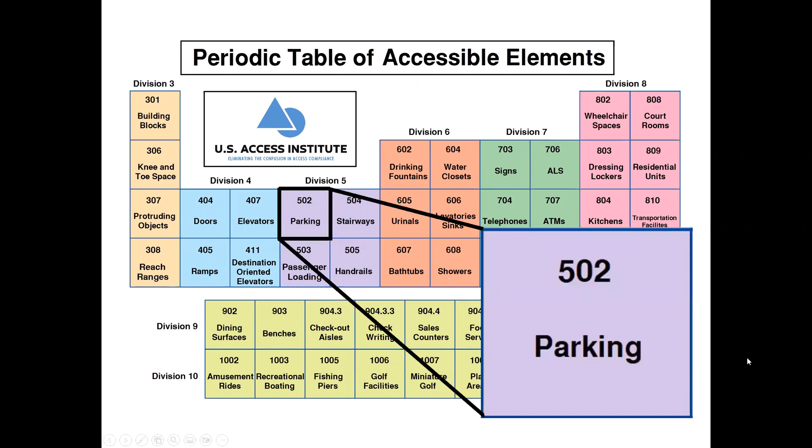All right, here we go. First, we start with the periodic table of accessible elements. It's not a real table in the access standard sense of things, but hey, we want access to be fun. Then we drill down to section 502, and that covers accessible parking space requirements. The 2010 ADA Standards for Accessible Design in section 502.2, vehicle spaces, says van parking spaces shall be 132 inches wide minimum. That's 11 feet.

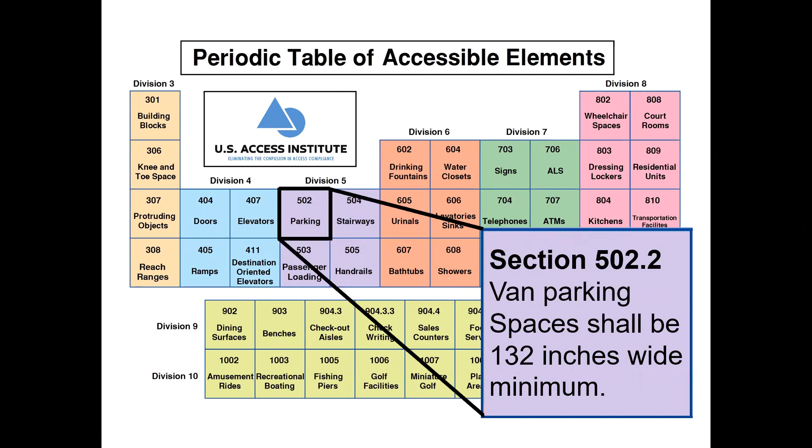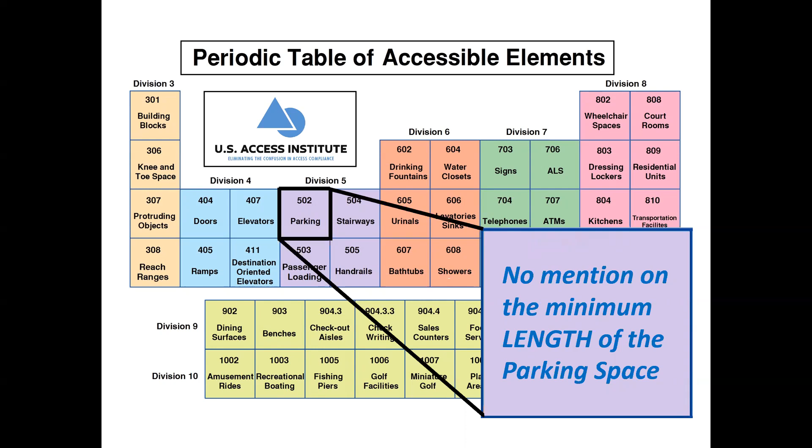There's no mention of the minimum length of the van accessible parking spaces, so let's do a quick review of some of the accessibility standards across the U.S. This figure is from the 2010 ADA Standards for Accessible Design and shows the van accessible parking spaces. They're 132 inches wide, but it does not mention the length. It is exactly the same requirement in the 2012 Texas Accessibility Standards.

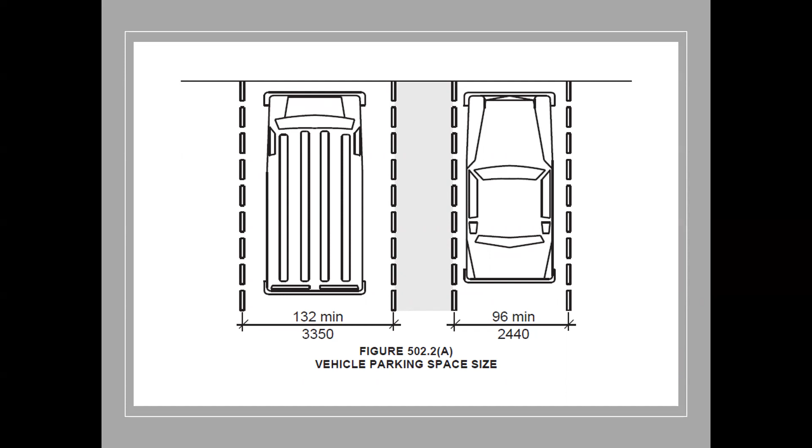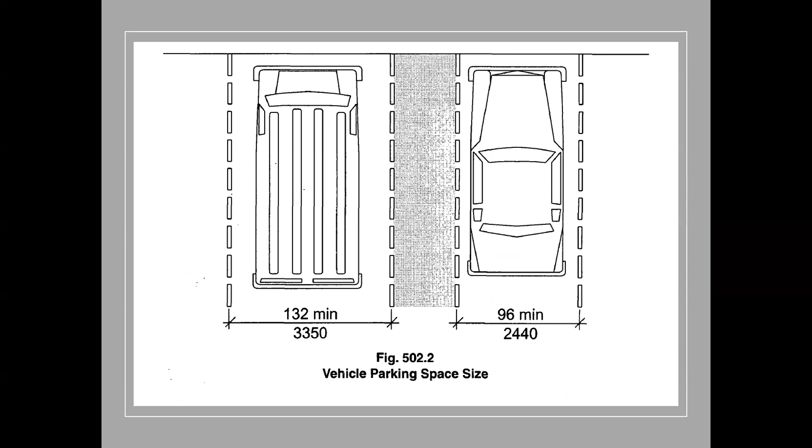In the ICC A117.1, we have the same 132 inches with no mention of length, and this is the same in the 2020 Building Code of New York State. The Fair Housing Act uses the ANSI A117.1, the 2003 standard, as a safe harbor, and the 132 inches is valid here with no mention of length again. In the 2020 Florida Building Code on Accessibility, the width of the van space is also 132 inches and no mention of length.

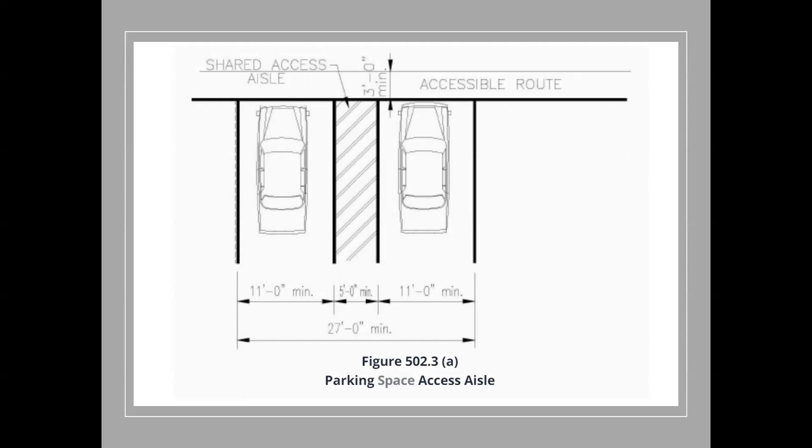The Illinois Accessibility Code has the same 132 inches or 11 feet if a 5-foot access aisle is provided. If a 96-inch access aisle is provided, the van accessible space may be reduced in width to 96 inches or 8 feet wide. All the other standards also provide that if we provide the 8-foot wide access aisle, we are allowed an 8-foot wide van parking space.

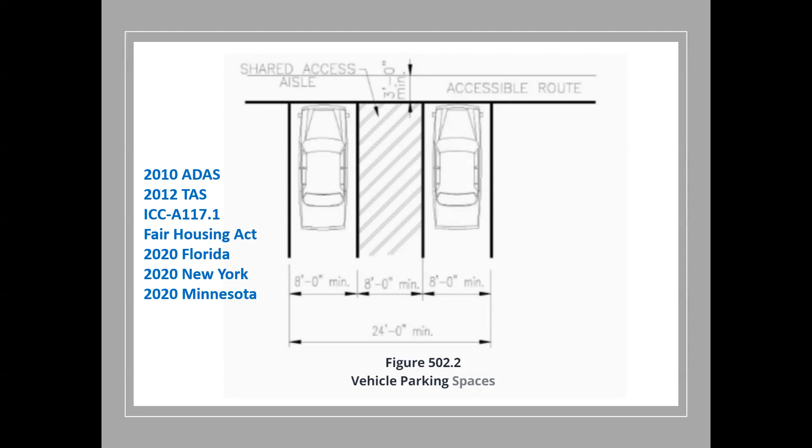However, in the 2022 California Building Code, section 11B-502.2 states that van parking spaces shall be 144 inches wide, which is 12 feet, and that is with a 5-foot wide access aisle. And now we actually have a standard that addresses the length. It states that car parking spaces shall be 216 inches long minimum, and that's 18 feet. The space may be reduced as in the other standards if the access aisle is increased to 96 inches or 8 feet. Then the van space may be 108 inches wide.

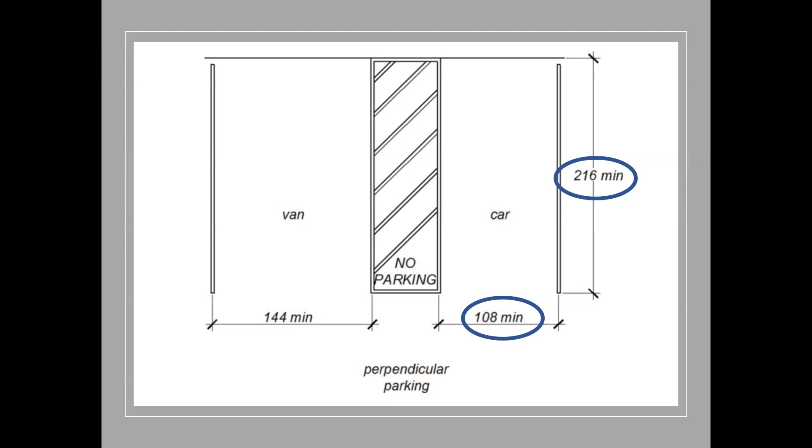So we have seen that California is unique in that it requires a minimum length in accessible parking spaces and is wider than all the other standards. All the other standards, such as the Florida Building Code accessibility provisions, have no length requirement, and they all offer a narrower van space if the access aisle width is increased. The length of a van accessible parking space, such as these in Texas, is then required to be just as long as the regular parking spaces.